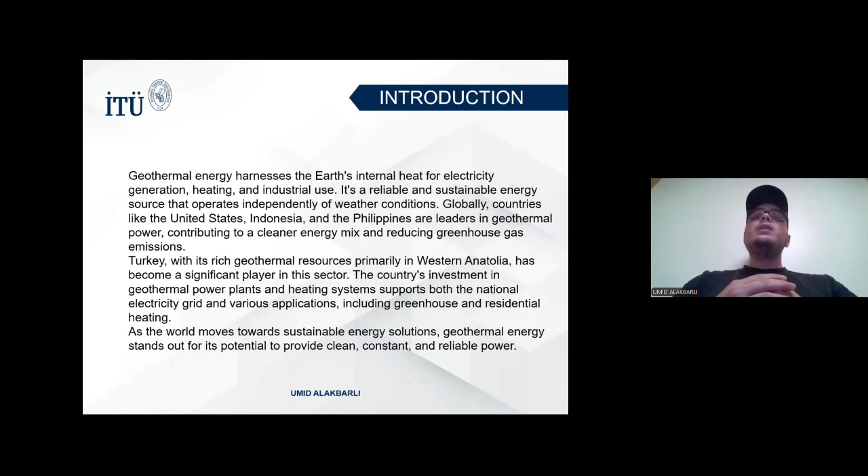The country's investment in geothermal power plants and heating systems supports both the national electricity grid and various applications, including greenhouse and residential heating. As the world moves towards sustainable energy solutions, geothermal energy stands out for its potential to provide clean, constant, and reliable power.

Hello, everyone. I'll briefly talk about geothermal energy in Turkey and the world. In Turkey, geothermal energy holds a key position. The country ranks first in Europe and fourth globally due to its location on tectonic fault lines. As of 2023, Turkey's installed capacity reached 1,710 megawatts, showing rapid growth over the last decade.

It is widely used for electricity production, district heating, greenhouse heating, and in tourism, with attractions like Pamukkale and Afyon's hot springs. Economically, geothermal energy creates jobs, reduces reliance on fossil fuels, and contributes to energy independence. The Aegean region leads the way with additional potential in central Anatolia.

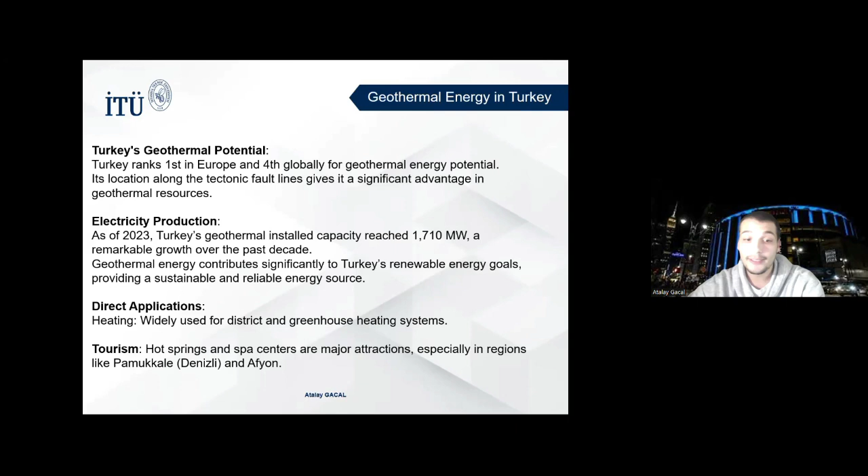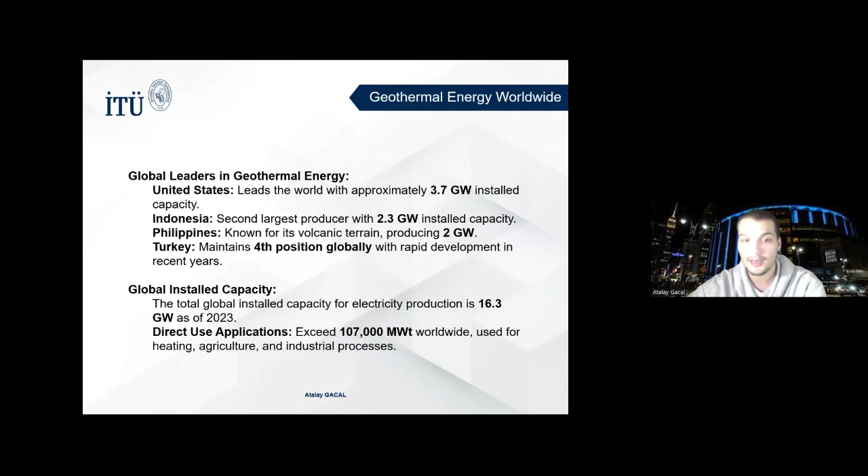Globally, the United States, Indonesia, and the Philippines lead in geothermal energy, with Turkey ranking fourth. Total global installed capacity is 16.3 gigawatts, and innovations like enhanced geothermal systems are expanding its applications. While challenges such as high cost remain, Turkey's government support and untapped potential provide significant growth opportunities. In conclusion, geothermal energy is a sustainable and reliable resource for Turkey and the world, contributing to a greener future.

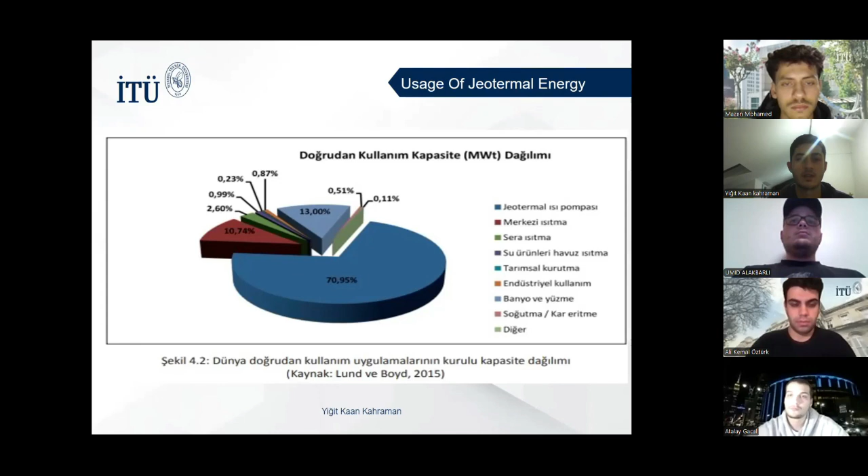Thank you. Hi, I'm Kaan. Today I will talk about the usage areas of geothermal energy. The usage areas are very diverse in Turkey and around the world. You can see the usage rates in the world on the graph. The main areas where energy is used are heat pumps, district heating, tourism, as well as agricultural areas and industrial use.

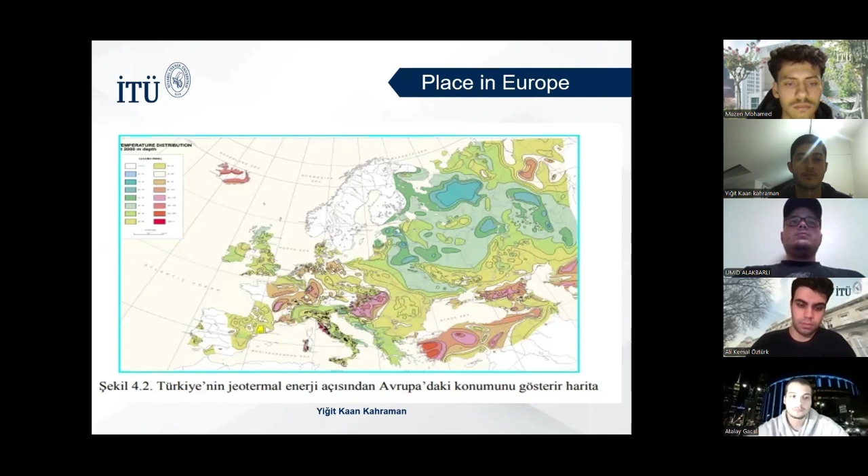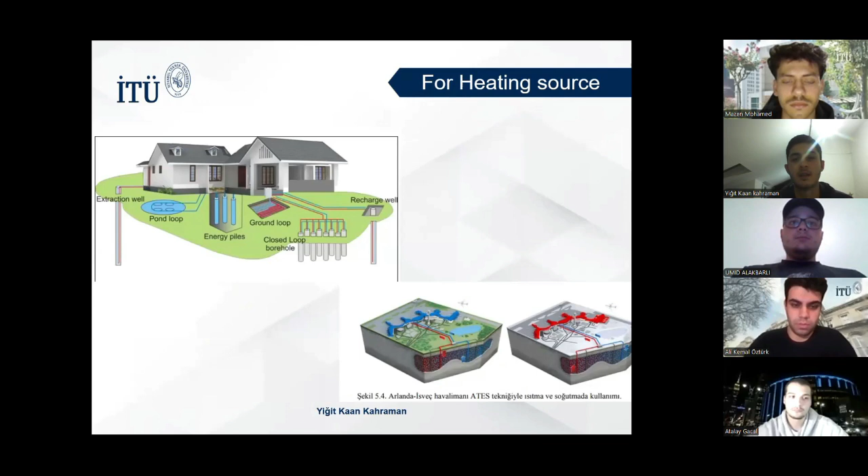Heating is the first heading. Geothermal energy is widely used in heating and cooling systems. Also, the resources provide solutions for some engineering applications. For example, they can be used in the ground to prevent icing on steep slopes and airport runways.

Another heading is tourism. The rich minerals of geothermal water are also very important for thermal tourism and the health sector. The best example in this field is Japan. They attract 15 million visitors annually with these thermal sources. In Turkey, regions like Denizli, Pamukkale, Afyon, and Yalova host local and foreign tourists in this sector.

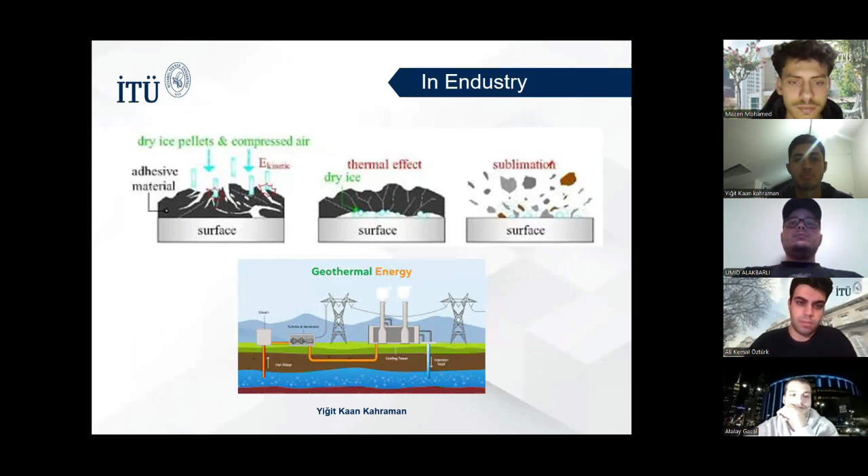Agriculture is another heading. Integrating geothermal energy into agriculture with heat pumps, greenhouses can achieve 68% energy savings with zero fossil fuel consumption. Another usage area is industrial application, mainly used for electricity production and dry ice production in this sector. Ali Kemal will continue the presentation.

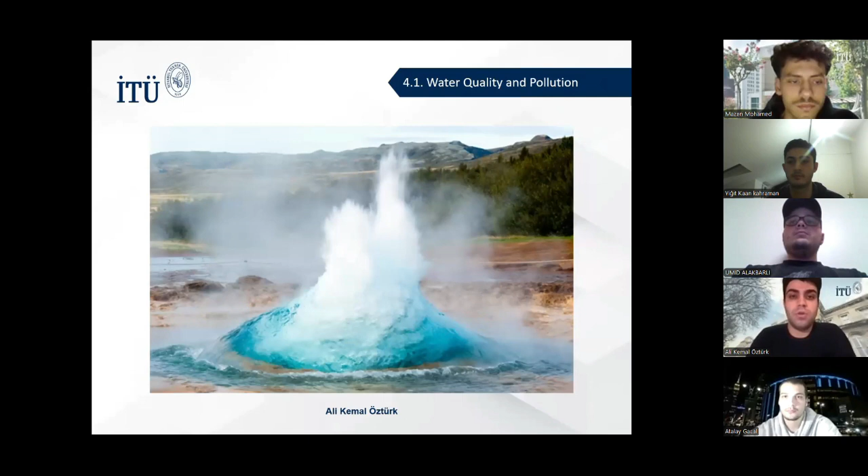It is really important: the environmental impacts and problems of geothermal energy. 4.1 Water quality and pollution. Geothermal fluids contain heavy metals and toxic compounds, which can contaminate surface or groundwater, affecting quality. Impacts: increasing salinity, loss of biodiversity. Next.

Air pollution: hydrogen sulfide emissions create odor and toxicity. Impacts: respiratory issues, deterioration of air quality. Example: an Iceland village affected by hydrogen sulfide emissions. Geothermal plants require extensive land use. Impacts: destruction of sensitive ecosystems, flora and fauna. Example: Philippines.

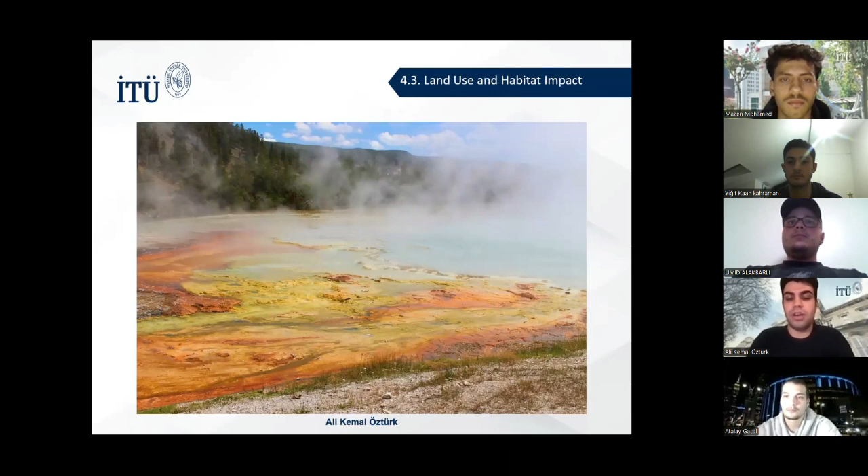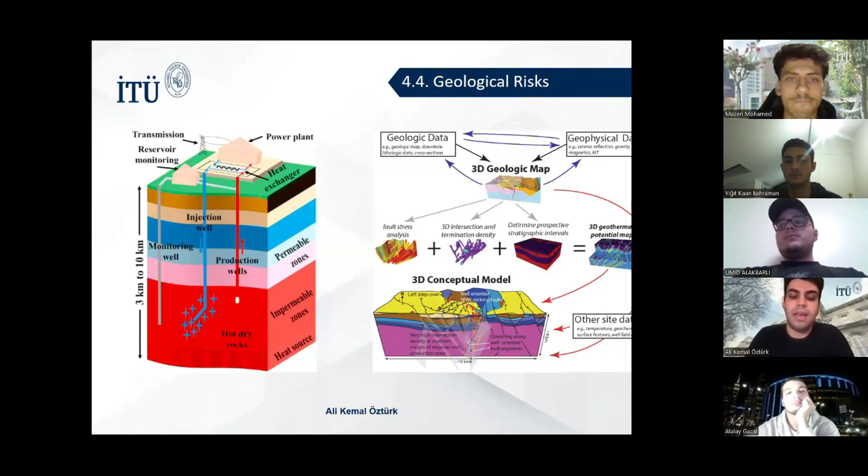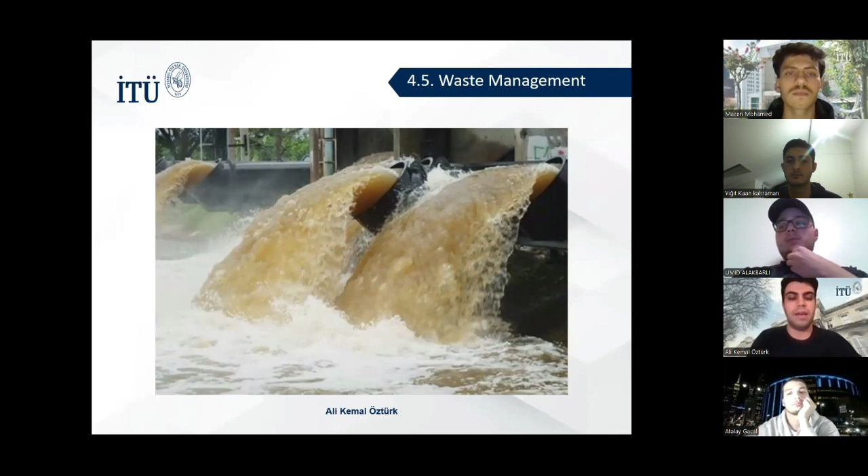Fluid injection can trigger micro seismic activities. Extraction may lead to land subsidence. Impacts: infrastructure damage, reduced agricultural productivity. Improper disposal of geothermal fluids and solids is a threat. Impacts: soil contamination, chemical accumulation.

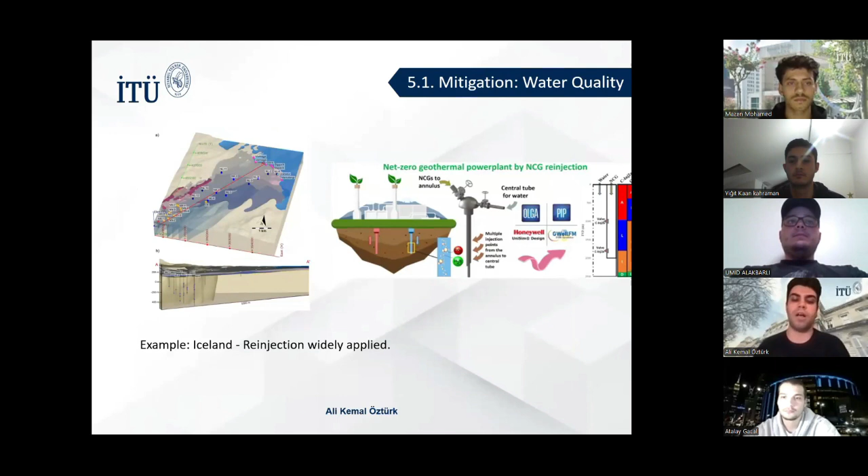On the other hand, we are now going to see mitigation. Water quality: reinjection, pumping fluids back to prevent contamination. Example: Iceland, where reinjection is widely applied. Chemical treatment: removing toxic compounds with reverse osmosis. Gas collection systems capture the hydrogen sulfide emissions. Example: USA, where binary cycle technology reduces gas emissions.

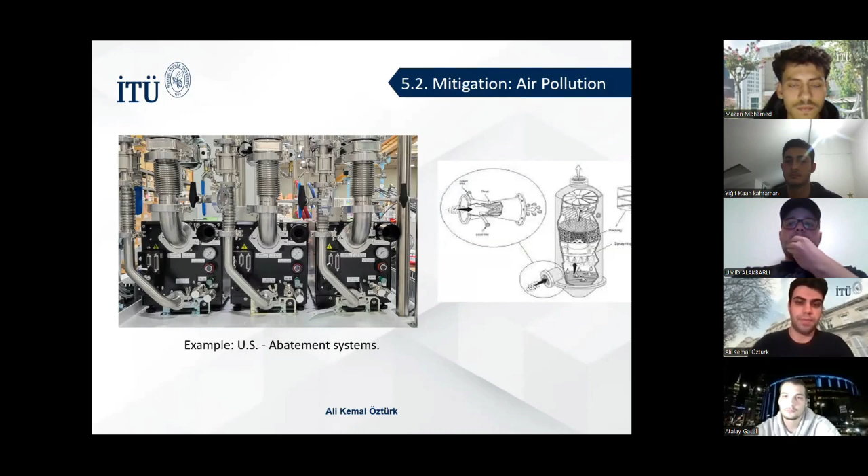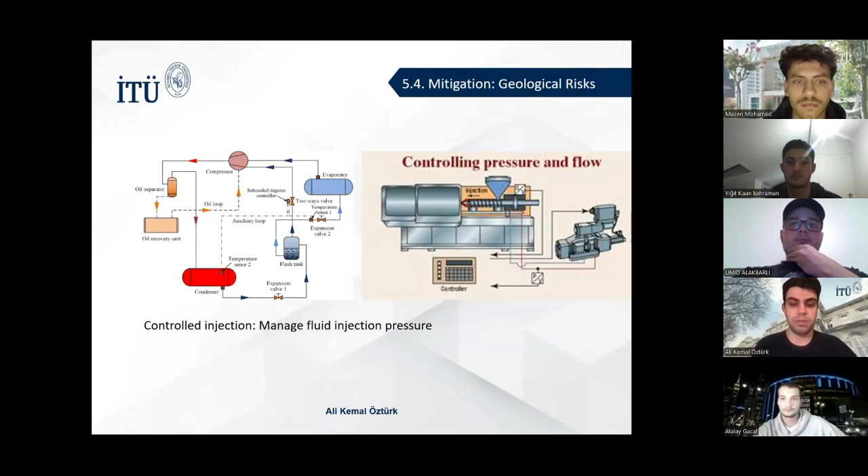Site selection: avoid sensitive ecosystems. Restoration: rehabilitate used land. Monitoring: install seismic risk warning systems. Controlled injection: manage fluid injection pressure. And the last one, recycling: recover silica and byproducts for industrial use. Example: silica used in construction. Protocols: manage waste per international standards.

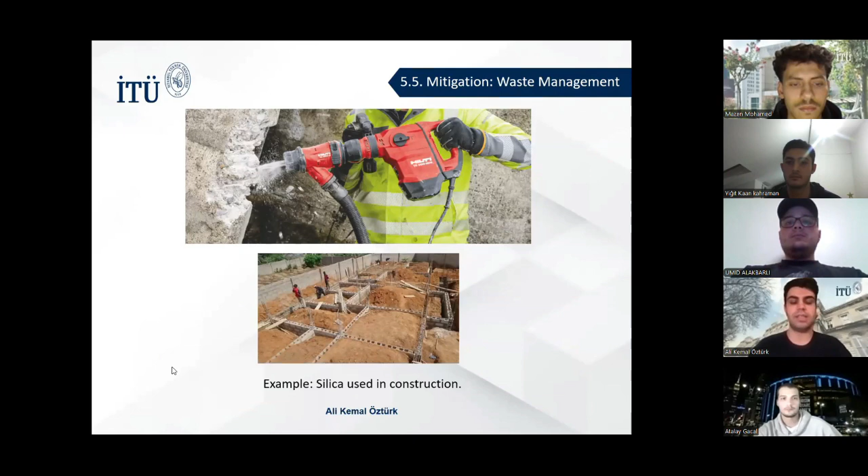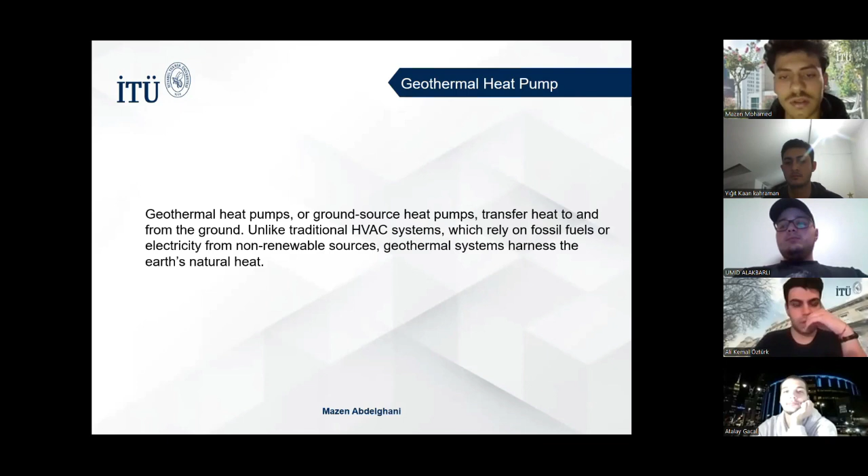Hello everyone, my name is Mazen. Today I'm going to talk about geothermal heat pumps, or ground source heat pumps. They transfer heat to and from the ground, unlike traditional HVAC systems, which rely on fossil fuels or electricity from non-renewable sources. Geothermal systems harness the Earth's natural heat. Next.

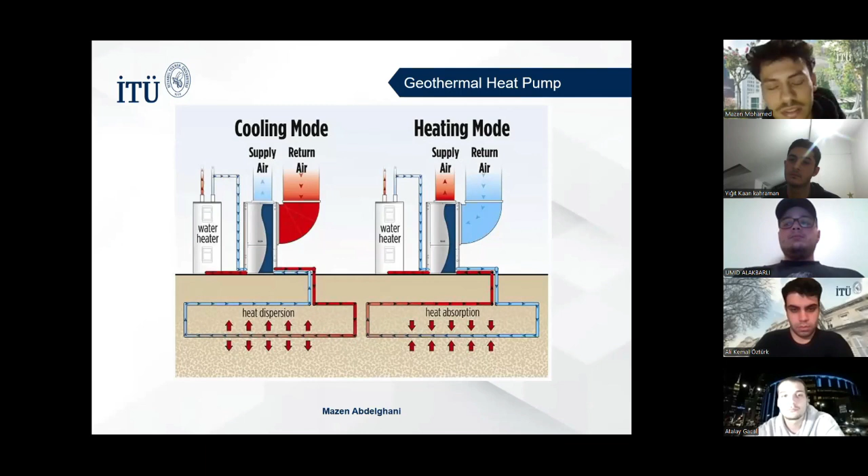Now I'm going to talk about how it works. In heating mode, a geothermal heat pump extracts heat from the ground. This heat is then amplified and transferred into the building. Conversely, in cooling mode, the system removes heat from the building and deposits it back into the ground. Next.

Efficiency and savings. Geothermal heat pumps are incredibly efficient. For every unit of electricity used, they produce 3 to 5 units of heat, translating to 300% to 500% efficiency, compared to traditional systems that typically operate around 80% to 95% efficiency.

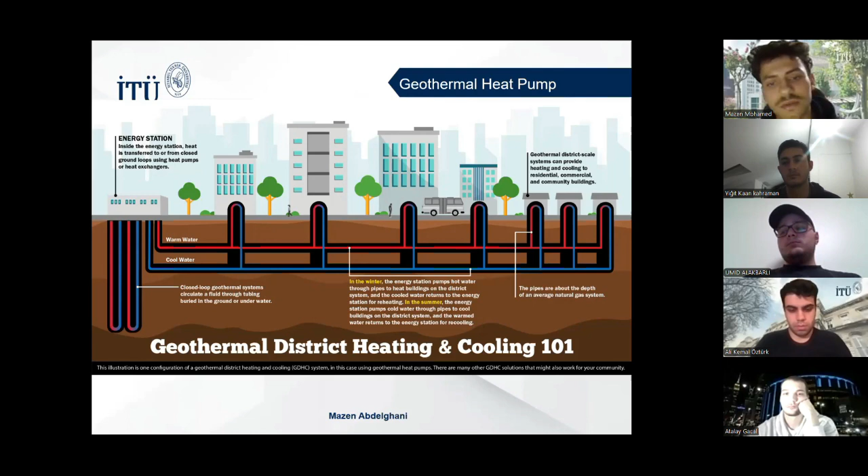Homeowners can reduce their heating and cooling bills by 30% to 70%. For instance, if a typical household spends $2,000 annually on energy, switching to a geothermal system could save them between $600 to $1,400 each year.

In installation and lifespan, initial installation costs range from $10,000 to $30,000, influenced by the system size and ground loop configuration. The average payback period is 5 to 10 years due to the energy savings and potential tax credits. We have 3 types of ground loops.

One, closed loop systems. We have horizontal loops, cost-effective for new constructions with available land, installed 4 to 6 feet deep. Vertical loops, suitable for limited space, more expensive, drilled to 100 to 400 feet deep. Pond or lake loops utilize nearby water bodies for heat exchange, cost effective if conditions allow.

We have another loop, the open loop system, which uses groundwater from a well as a heat exchange medium, requiring a sufficient water supply and regulatory compliance. In lifespan considerations, ground loops are extremely durable, lasting 50 years or more. Heat pumps have a lifespan of 20 to 25 years, similar to traditional HVAC systems, with regular maintenance extending performance.

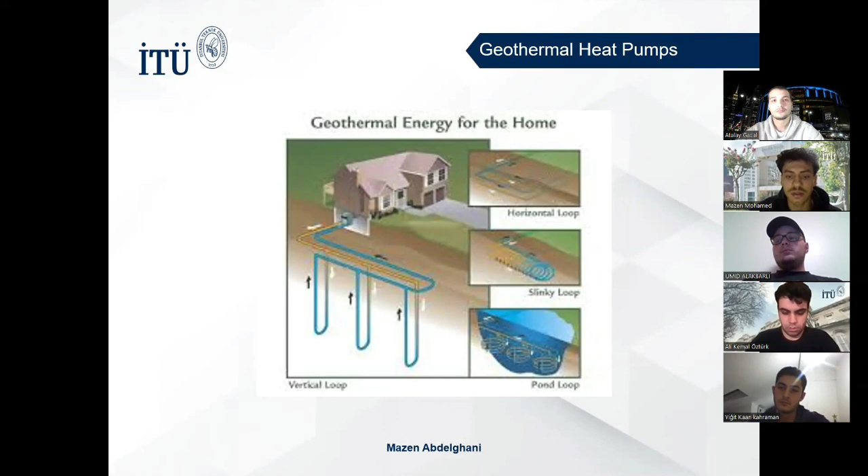To sum up, geothermal energy is a sustainable and reliable renewable energy source with the potential to significantly contribute to the global energy mix. While it currently meets a small fraction of the world's energy demand, technological advancements and cost reduction could see its role increase substantially by 2050. In Turkey, geothermal energy is a key player in the renewable energy sector.

With its significant geothermal resources, particularly in Western Anatolia, Turkey is a global leader in both geothermal heating and electricity generation. Continued exploration and development efforts in the country will further harness this renewable resource, contributing to Turkey's energy security and sustainability goals. Overall, geothermal energy offers a promising path towards a cleaner, more sustainable energy future both globally and in Turkey.